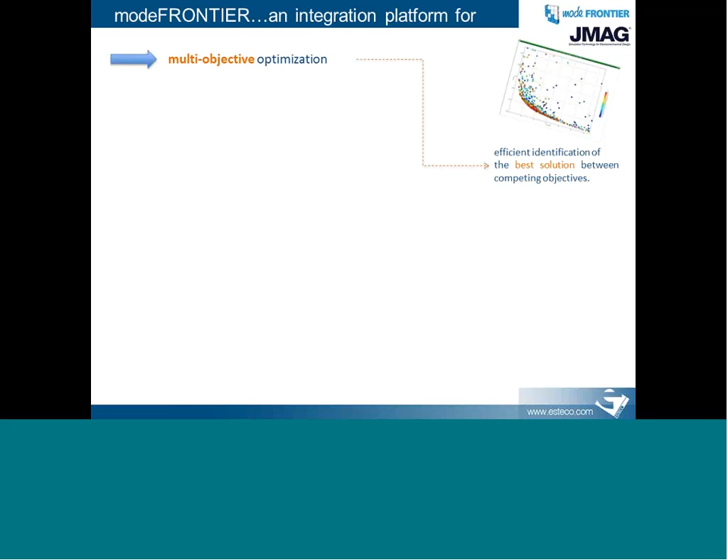Multi-objective means that you will have more than one objective, and these could be in conflict with each other. So the tool will allow you to select a set of optimal solutions that you as a designer can move forward with.

It is also a platform for multidisciplinary design. That means that traditionally people were maybe focused on their own discipline, whether that was structural analysis, electrical analysis, but with concurrent engineering being more popular these days, you have to go into MDO, multidisciplinary design, in order to make sure that whatever changes you make to improve your part of the product does not negatively affect the performance of someone else's component.

In modeFRONTIER, you can automate that by having these different tools that belong to different disciplines link to each other and communicate with each other. So you can take the export from one application and feed that as an input in the next application, and all these processes are automated for you.

Finally, having a good solution doesn't mean much if you cannot really identify what that solution is. You need to have powerful post-processing capabilities to really understand what is your best design, what potential trade-off do I have, does it correlate or does it not correlate, what's the scatter of my data, for example, and that can be analyzed in the post-processing module of modeFRONTIER.

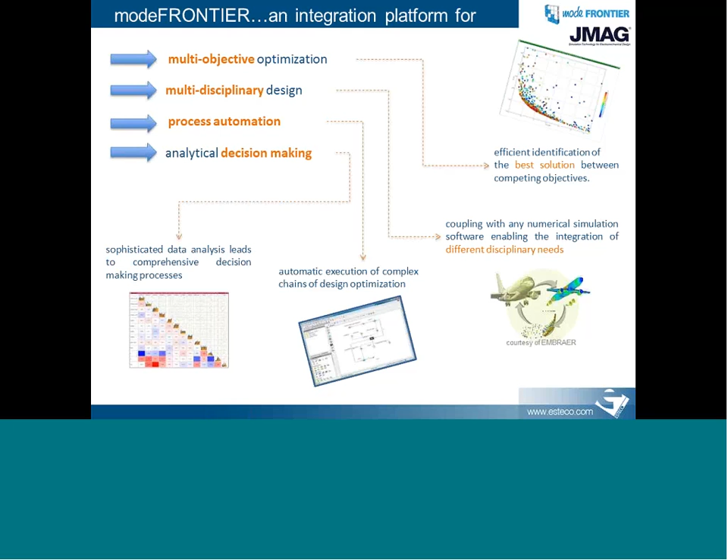These are the main components of the software. On the process integration side, the modeFRONTIER software is very powerful in linking third-party commercial softwares, but also in-house written tools. We have direct integration with many of the most commonly used CAE and CAD packages, but we can also, through simple command line, communicate with your own in-house tools if you have those.

On the design of experiment side, we can use several algorithms to populate your initial design, which can be used as a starting point for your optimization. On the optimization side, we have about 20 different algorithms, varying from very basic to very advanced, and we will cover some of those later today.

Response surfaces can be used instead of a direct optimization, as long as your correlation is high enough, giving you a solution in a much quicker way. On the robust design aspect, if you know you have certain manufacturing tolerances on your product, you can assign those to your input parameters, and the tool will take that into account in its evaluation.

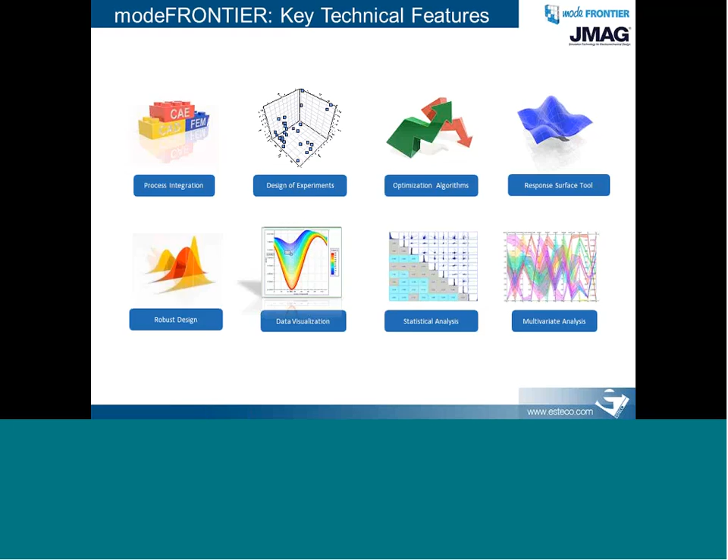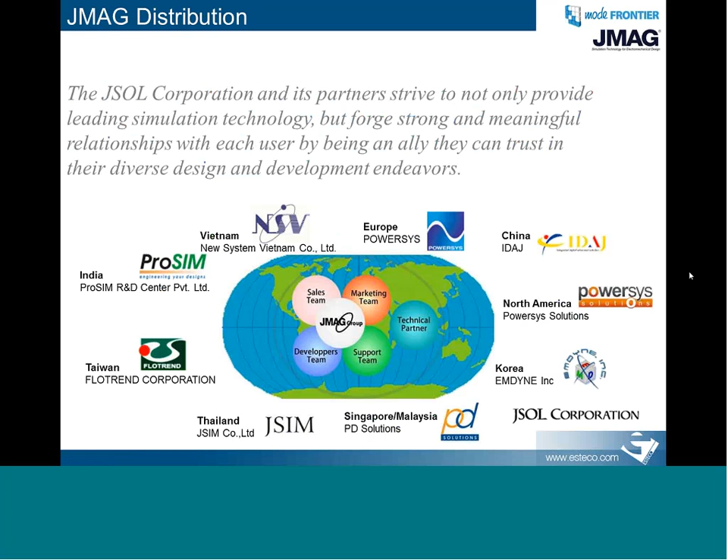JMAG is sold globally through a network of distributors. JSOL handles the sales for JMAG in Japan, but distributors handle the sale of JMAG across the world. The distributor for both North America and Europe is Powersys Solutions. Powersys has been the distributor of JMAG since 2006 in Europe and since 2009 in North America. Powersys' main mission is business development, sales management, pre- and post-sales support of JMAG, promotion of JMAG at various events, and technical support and training services.

Powersys also partners with JSOL to ensure that customers' needs are being met by providing feedback on what customers want from JMAG as well as what their experience in using JMAG is.

So let's take a look at the JMAG product line. We'll start with JMAG-Express, which is a very basic way to set up a template-style analysis for a machine. This covers most basic rotating machines and is easy to manipulate and modify in order to generate a simple motor analysis. We can also build motors or machines or any other type of electromagnetic analysis component using our link with CAD packages such as CATIA, SolidWorks, NX, and ProE.

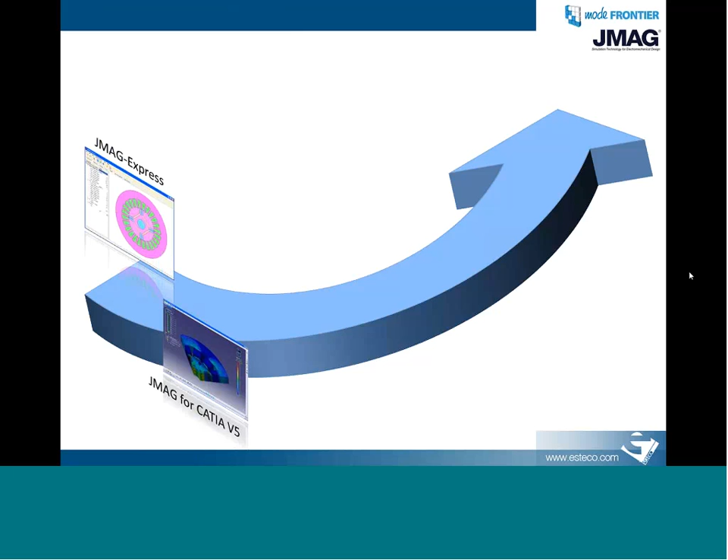Once the model is constructed either in JMAG-Express or in CATIA, we can move to JMAG Designer, where we can do a full electromagnetic finite element analysis. We can also link to programs such as Abaqus, where now we can do multi-domain analyses in structural, thermal, and computational fluid dynamics domains.

JMAG can also use our JMAG RT Motor Model tool, which allows us to create a performance lookup table across the operating range for a rotating machine. These lookup tables can be brought in block form using our JMAG RT Viewer tool, which can help visualize performance across the operating range, in this case showing the efficiency plot versus torque and speed of a rotating machine.

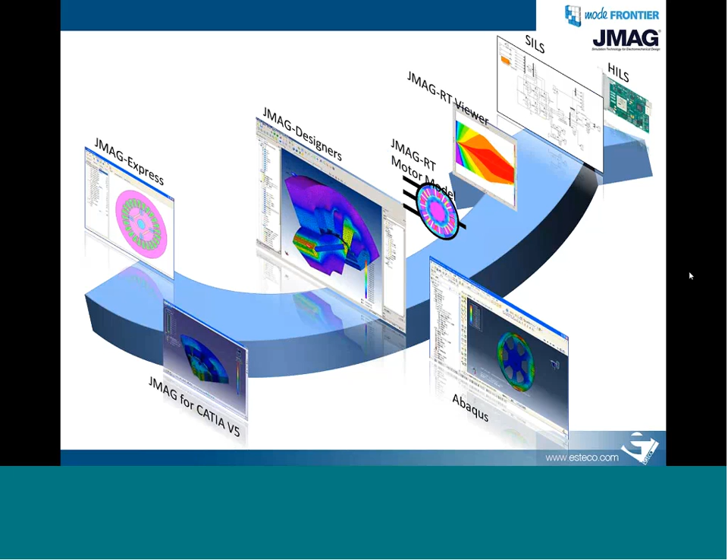That RT block can also be brought into software-in-the-loop simulation programs such as MATLAB Simulink, PSIM, and Synopsys Saber. We can also enter into hardware-in-the-loop simulation systems from companies such as National Instruments, Opal RT, and dSPACE. JMAG Designer can also link with modeFRONTIER to run an optimization analysis, which is the focus of today's webinar.

So let's actually take a look at creating the optimization model in JMAG. Our motor under investigation is an IPM machine with 2 magnets per each rotor pole. The IPM machine itself has a 112 millimeter stator outside diameter, a 55 millimeter rotor outside diameter, and is 37.5 millimeters tall. Its rated performance is at 1800 RPM, which is a 60 Hertz electrical frequency, and the rated torque occurs at a 7 amp peak current, a pure sine wave excitation at a 0-degree phase angle.

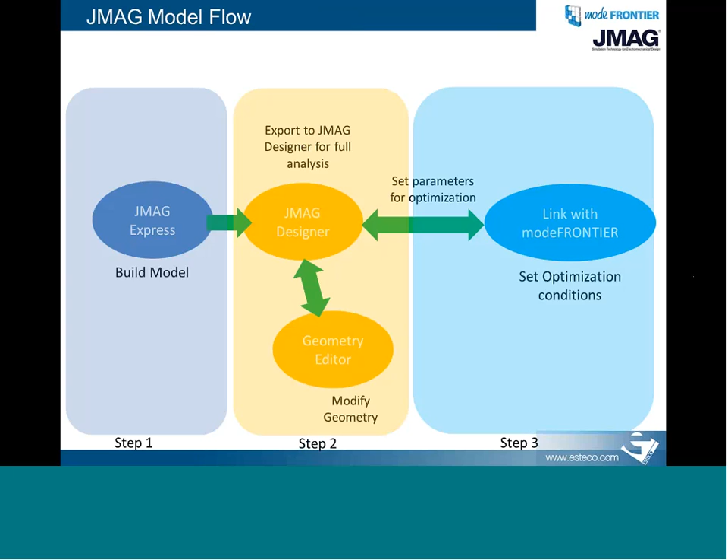Our model flow is like this: we start by building the model in JMAG-Express and then exporting it to JMAG Designer for a full FEA analysis. In JMAG Designer, we can also link to our geometry editor to modify the geometry. The final step is to set the parameters for optimization and the optimization conditions for the link with modeFRONTIER.

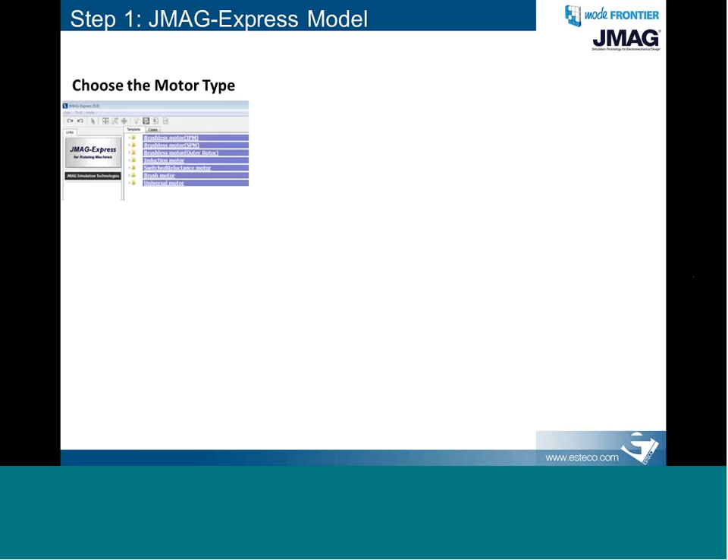So let's start at step 1, our JMAG-Express model. We first open JMAG-Express and choose the type of motor we want to work with. JMAG-Express covers most common rotating electric machines such as IPM, surface permanent magnet machine (SPM), brushless motor, outer rotor, induction machines, switched reluctance motors, brushed motors, and universal motors.

Once we choose the motor type, we select the rotor and stator configuration, and set the conditions using our tabular format. The geometry tools let us automatically modify the geometry, apply different materials, apply windings, and set the drive conditions automatically in JMAG-Express.

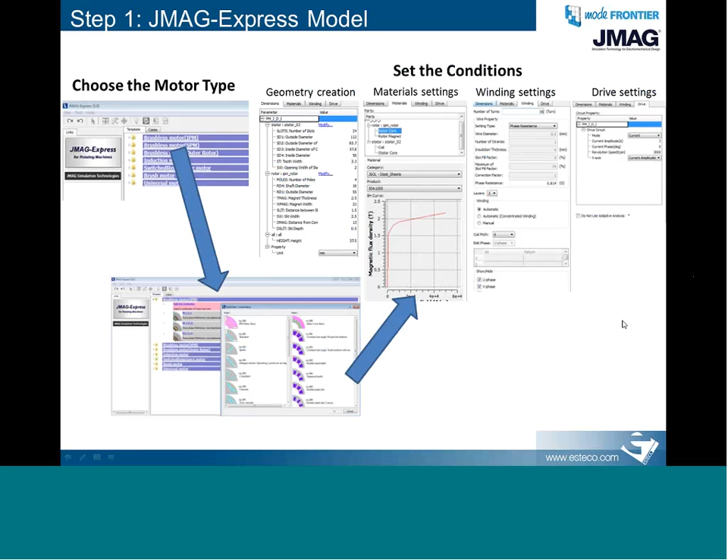Once we've set the conditions, we can run a quick analysis, which provides a rough estimate of machine performance. Effectively in JMAG-Express, we have a calculation setup that takes minutes and results that we obtain in just a matter of seconds.

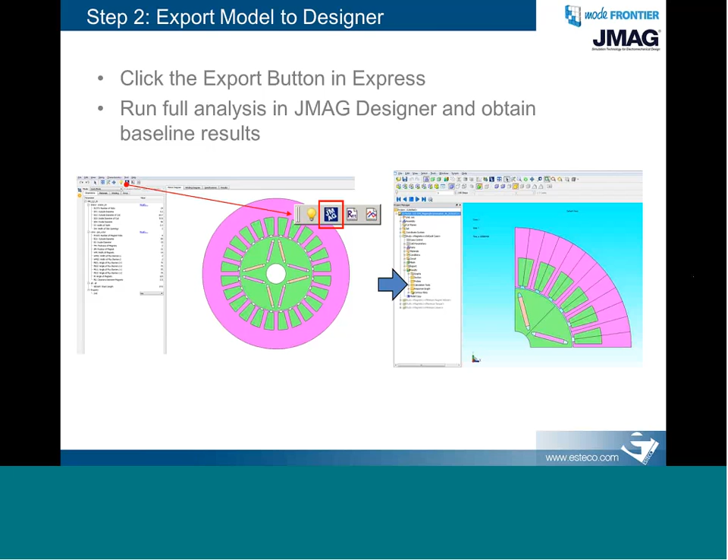Once we're satisfied that the results meet our minimum performance requirements, we can export the model to JMAG Designer to run a full FEA analysis and obtain our baseline results. At this point, I'll pause and switch over to JMAG-Express to demonstrate that process.

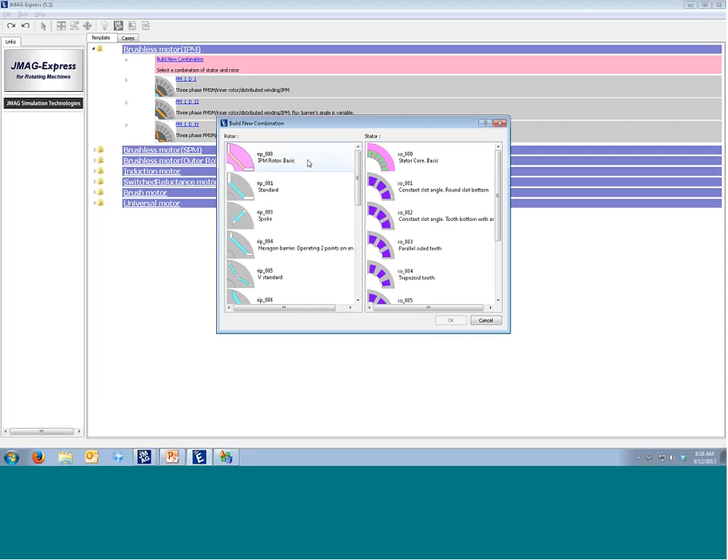If I open JMAG-Express, you can see we can select from our basic machine topologies. In this case, this example is going to use a brushless motor IPM. We can either build a new combination by selecting the specific rotor and stator geometry, or select from some predefined geometries already created in the Express library.

I'll select this geometry, which corresponds to our 2-magnet-per-pole rotor topology. The default geometry brought up actually matches the geometry we want to work with for the IPM machine, so no modifications to the dimensions are necessary.

If we wanted to modify the dimensions, it's very easy to set new parameters. For example, we can change the number of slots on the stator very quickly—I'll just change that back—or go through and change any of the other dimensions in the geometry.

Once our geometry is set, we move to our Materials tab, where we choose materials for the rotor, the stator, and the magnets. In this case, our rotor magnet is a neodymium iron boron with a BR of approximately 1 Tesla.

We've applied that to both the first and second magnet. Our rotor core is a 50A1000, a Japanese or JSOL sheet steel, and that material is also used in our stator core. Again, we can access the entire JMAG material database to apply materials for the stator, the rotor, and the magnets.

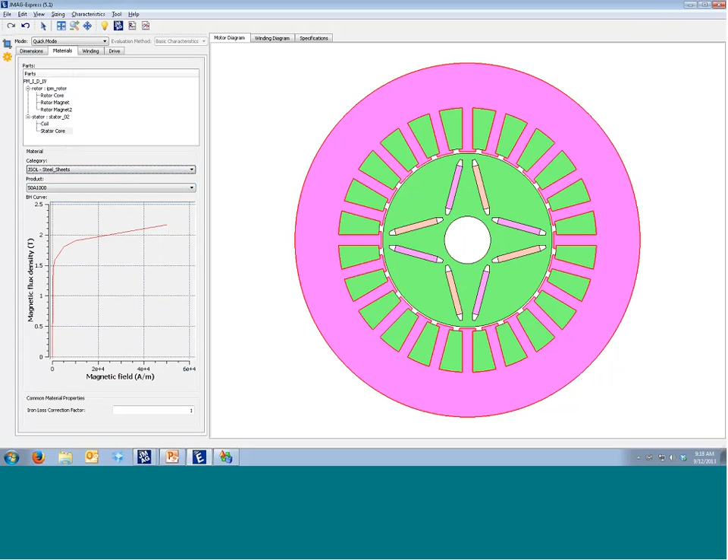Once the materials have been applied, we move to our Winding tab. JMAG will automatically determine the winding pattern based on the number of slots and rotor poles. We can use an automatic winding, an automatic concentrated winding, or manually set up the winding by specifying the input and output slot for the coil.

Once the windings are set, we move to our drive conditions. This is the only difference between this model in Express and the model we want to analyze for the optimization study. This model currently uses a voltage source.

We want to switch that to a current source, and change the peak amplitude from 3 amps to 7 amps. I also want to change the rotational speed from 3,000 RPM to 1,800 RPM.

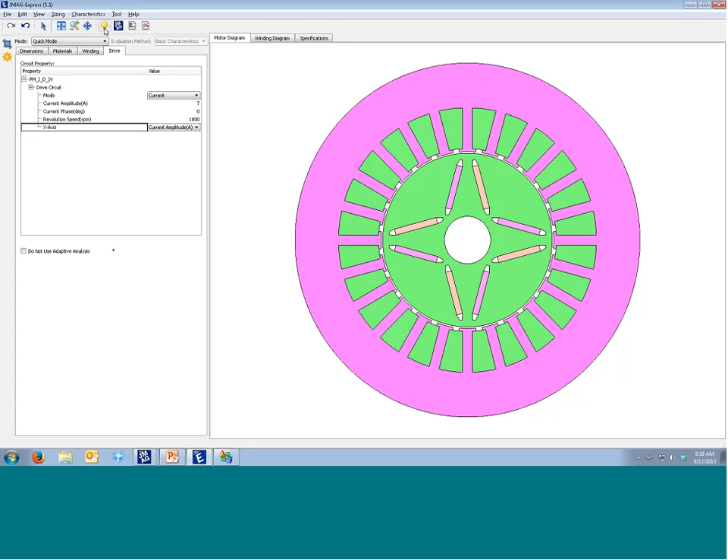At this point, we can run the quick analysis by pressing the light bulb button. As I said, results are generated in just a matter of seconds, so it's a very good first-pass approximation for machine performance. The results we can view now include torque versus current, efficiency versus current, copper and iron losses, DQ inductance, phase voltage versus current, torque constant, average tooth flux density, and rated current.

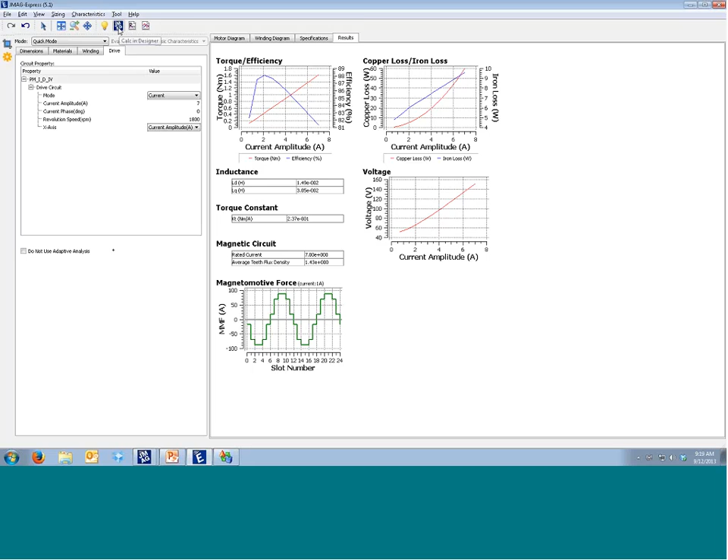We can also visualize the magnetomotive force. So once we get a machine performance that looks approximately correct or achieves the approximate results that we want to see, we can then click on our Calc in JMAG Designer button, which is then going to ask us to export a JCF file. I've already set up a folder on my desktop and exported the JCF file for this analysis.

When the model is exported from JMAG-Express into JMAG Designer, all the settings have already been applied. Our assembly components have already been set. Our analysis conditions have already been applied for both all the phase coils, any periodic boundary conditions, the rotational condition, the torque condition, and any other boundary conditions that need to be applied.

So effectively at this point, all that's left to do is right-click on our study and click Run Active Case. I've already run this analysis, and this will take maybe about 1 minute to 2 minutes, but I didn't want to slow down the webinar by going and having to wait that minute and a half for this to compile.

So once we finish running the analysis, now we can view the results. So again, this is a full FEA analysis, which will give us some pretty comprehensive data as far as the material performance goes, or the actual machine performance.

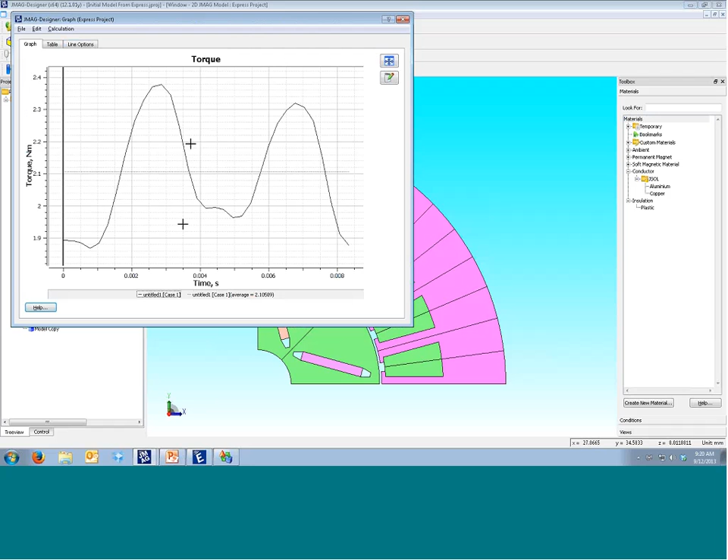So now in our results, I can look at things like our average torque. So there's our torque waveform, and then our average waveform can be set by clicking on the average button. So now we can see how that is applied to create that average value. So I'll close that down.

We can also look at contour properties such as the magnetic flux density, vector parameters such as, in this case, again, the flux density, or flux line plots. So again, coming in from JMAG-Express, we have a full and comprehensive FEA analysis capability in JMAG Designer.

So now I'll step back into the presentation and we'll talk about what we're going to do for the optimization. You can see we have our machine here, and what we want to optimize is basically the rotor magnet geometry. So the geometric parameters that we're going to pull out are the magnet thickness, the magnet width, the magnet angle, the magnet clearance, and the magnet position.

The thickness and the width of the magnet, as well as the magnet angle, are pretty self-explanatory. The magnet clearance is the space between the center line, or the edge of the rotor, and the end of the magnet. And the magnet position is the position of the front edge between the front edge of the magnet and the origin of the rotation.

Besides the geometric parameters, we also want to optimize the machine parameters, and for this we want to take a look at changing the applied current phase angle. To judge the quality of the optimization, we're going to set a couple of the output parameters. These are the average torque and the stator iron losses.

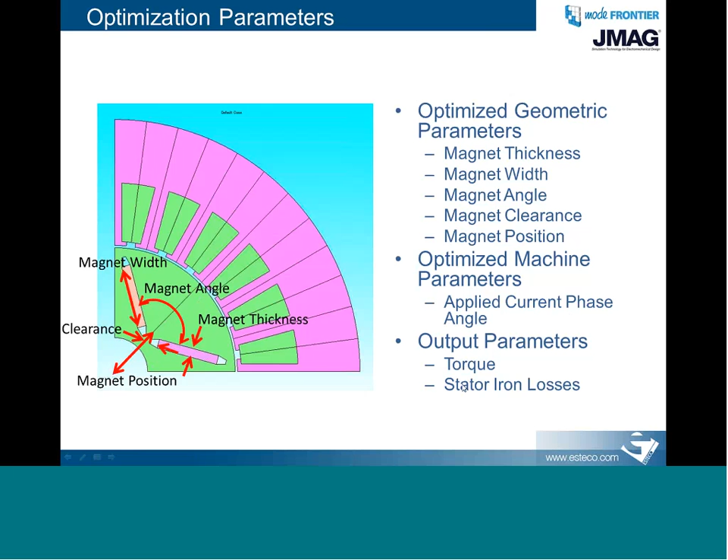When the model comes in from JMAG-Express into JMAG Designer, it has a default naming topology for all the dimensions that were used to generate the model. This naming convention can be a little bit hard sometimes, or a little bit confusing to go through and pick out the actual specific dimensions that we want to work with.

So sometimes it helps to open the geometry editor and rename some of the CAD parameters in the CAD parameter list to more easily identify them when you're trying to set the conditions for the optimization.

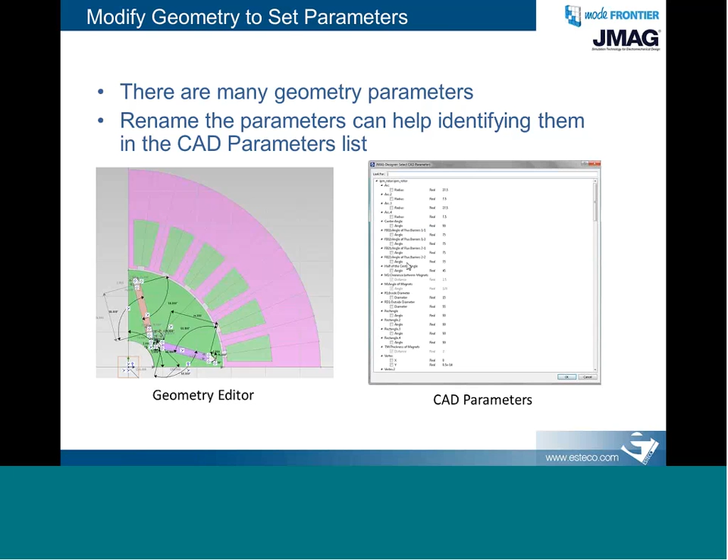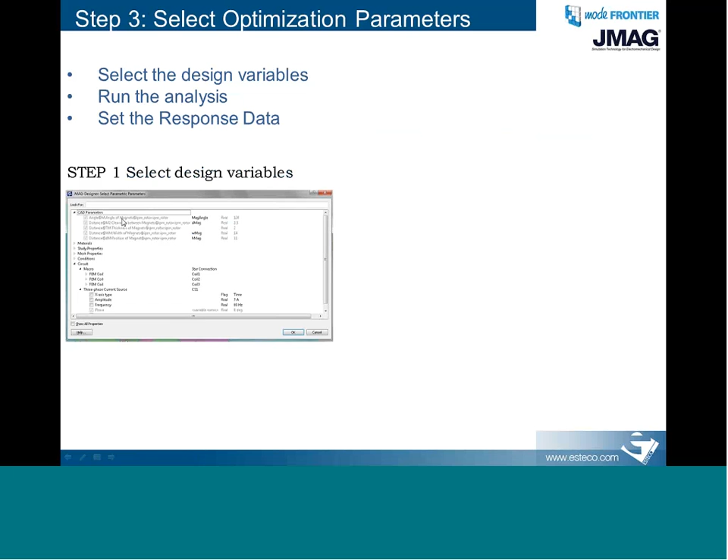Once we rename them, if we want to, we then have to select the design variables. So when we select the design variables, now we're going to open the list of the parametric parameters available in the JMAG Designer analysis, and we're going to choose the parameters. In this case, I've highlighted our CAD parameters, which again are the angle of the magnets, the clearance between the magnets, the thickness of the magnets, the width of the magnets, and the position of the magnets.

Once we've selected our design variables, we can then run the analysis. After we run the analysis, now we can set the response data. So we have to run the analysis in order to set the response data, because the response data is effectively the output of the analysis. So in order to generate the output of the analysis, we actually have to run the analysis.

So when we select our response data, now we can pull out from all the other parameters or all the other data that we've achieved in our analysis. Now we can pull out the specific data points that we're most interested in.

In this case, it's our torque, and I selected our iron loss on our stator and the iron loss on our rotor. In this case, we're not going to use the rotor iron loss, so it's a bit of a superfluous setting, but I left it in there anyway, in case we wanted to go back and add that to the optimization at a later date. So at this point, I'll step out of the presentation and go to JMAG Designer in order to do that demonstration.

So now I move into JMAG Designer, and this is effectively the same model that we got from JMAG-Express. I did make a few modifications, though, in order to more accurately capture the results. First off, you can see I changed the number of steps. The default coming out of Express is 33 steps, so I changed that to 65 steps to get a little bit higher fidelity, and to add a little bit more time.

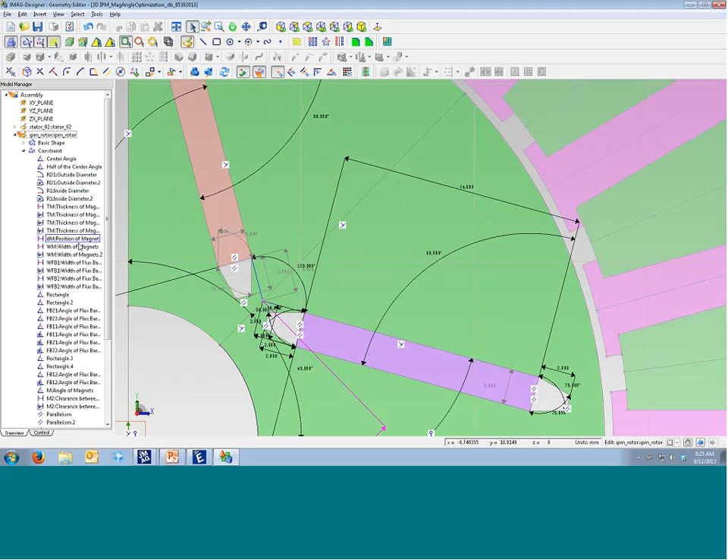Now, though, we have to go through and select our CAD parameters. As I mentioned, we can go into our geometry editor and we can change the names of some of the parameters. So again, the default naming scheme can sometimes be a little bit confusing, and you can see there's a lot of different constraints that we're going to have to sort through.

So I can go through and by clicking on any of the constraints, I can rename them to make them a little bit more easy to find.

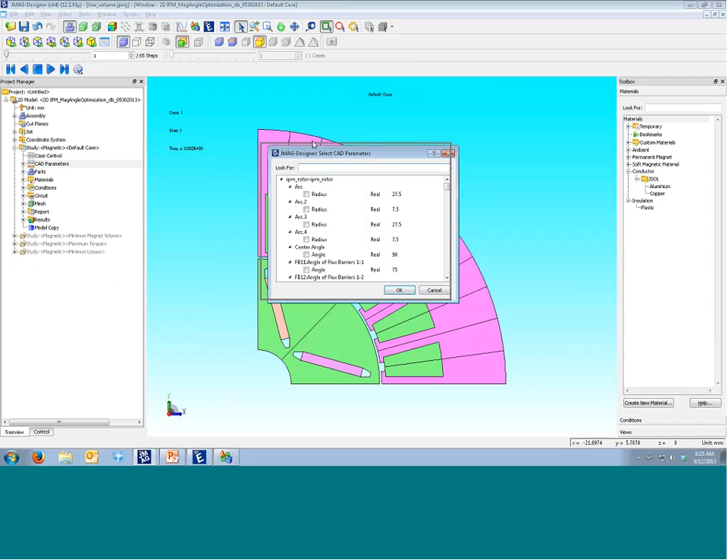Once I've renamed them, now I have to go through and actually select the CAD parameters that I want to optimize. So when we're setting our parameters for optimization, there's our main optimization list, but then there's also our CAD parameters that have to be selected separately. So I'll right-click on our CAD parameters and click on Select CAD Parameters, and this will give us all the constraints that we just saw on the geometry editor.

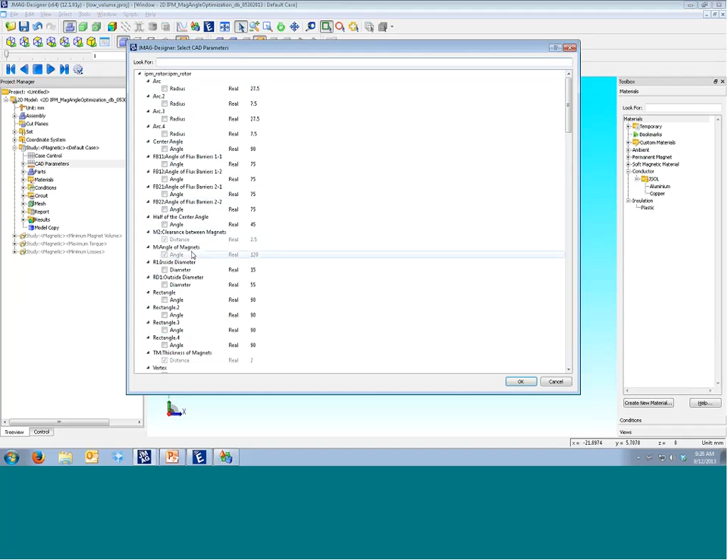So as I said, sometimes there's a lot of constraints, so renaming something a little bit more familiar to yourself might make things a little bit easier to identify. In this case, I've selected the clearance between the magnets, the angle of the magnets, the thickness of the magnets, the width of the magnets, and the position of the magnets.

So once I select those points, they're populated under my CAD parameters list. And so now this means that I can go through and I can actually click on Modify and then change the value. This value is actually grayed out since I've run the analysis, but if this was an empty analysis or if this analysis didn't have results, I could go back and change any of these dimensions and then apply them to my actual physical JMAG model.

Once I've specifically called out the CAD parameters, I can now go and select all the parameters for my optimization. So I select all the CAD parameters that I've chosen, and then I can go through and I can select any of the other properties in this analysis for optimization. So I can change the materials, I can change some of the study properties, I can change the mesh properties, and I can change the conditions in my magnetic circuit.

So in this case, I'm not going to change any of the coil conditions, but I am going to go through and select the phase angle on that excitation current. Again, the default value is 0. We want to optimize this to determine the correct phase angle to give us the maximum torque point.

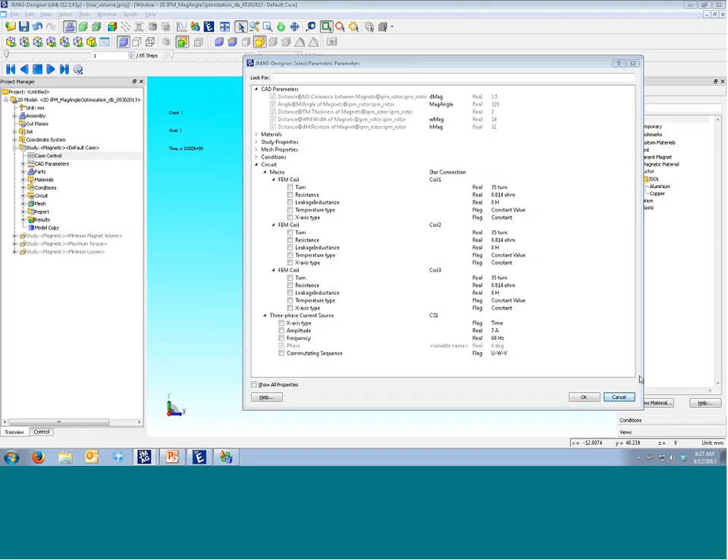Once I've selected the parameters in that parameters list, I run the analysis and generate the results. Once I generate the results and look at the graphs and tables, there's a lot of results to sort through. If I had to pick these out or go into modeFRONTIER to do the optimization and sort through the entire list of possible results, it would be a bit tedious.

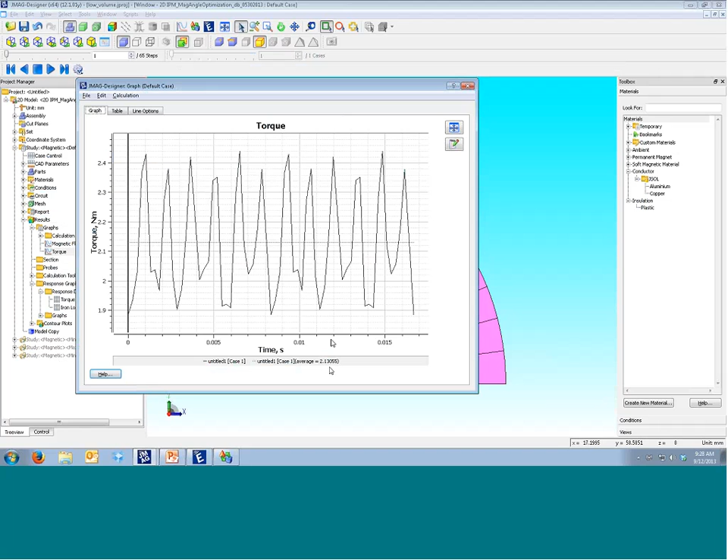So to make that easier, we added the response data function, which means we can take a value or a point sequence value such as torque and come up with an average value for our torque. Let's take a look at that. If I graph it, our average value is about 2.13 Newton meters. So I can go through in our tabular data, click Summary, get that average value of torque, and then click on Response Data to register it as response data.

I'll do the same thing on the iron losses, where I'll click on Response Data and register my stator and rotor iron losses as response variables. When I register the response data, it's collected in this response graph in the response data folder. So now I can see I've registered torque and my iron losses on the stator as response variables. At this point, all that's left is to click Save, and now I can move the model over to modeFRONTIER to do the full optimization on it.

But before I hand the presentation back to Brandon, I want to mention a couple things. The goal of this optimization is to minimize the magnet volume, maximize the torque, and minimize the stator iron losses, all while having a motor that achieves at least 2 Newton meters of average torque.

Since this is an IPM machine, the magnet size and shape play a significant role in the actual output performance of the machine. An IPM machine also derives its total electromagnetic torque from both a reluctance torque component as well as a magnet torque component. This means that since I have a reluctance torque that is a significant player in the total torque, my actual peak torque as a function of phase angle will not occur at 0 degrees, as it would in a surface permanent magnet machine, but at some other value.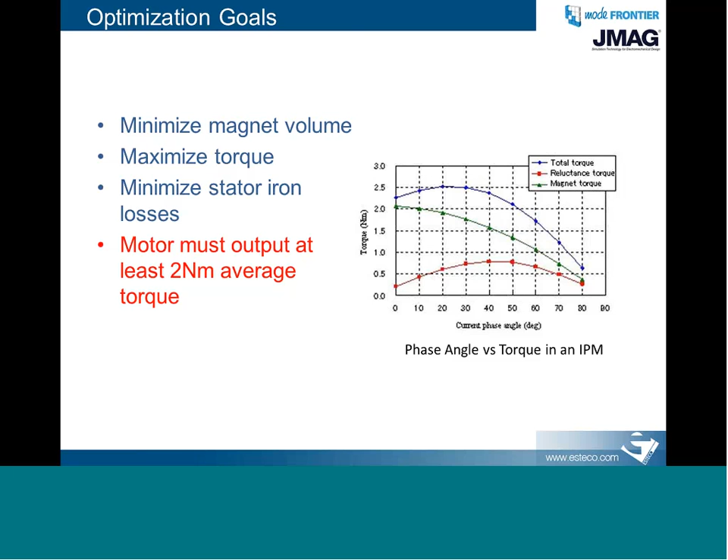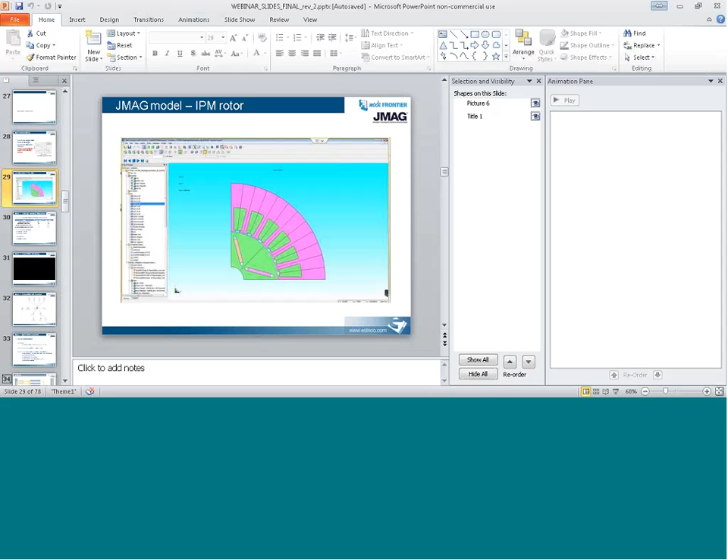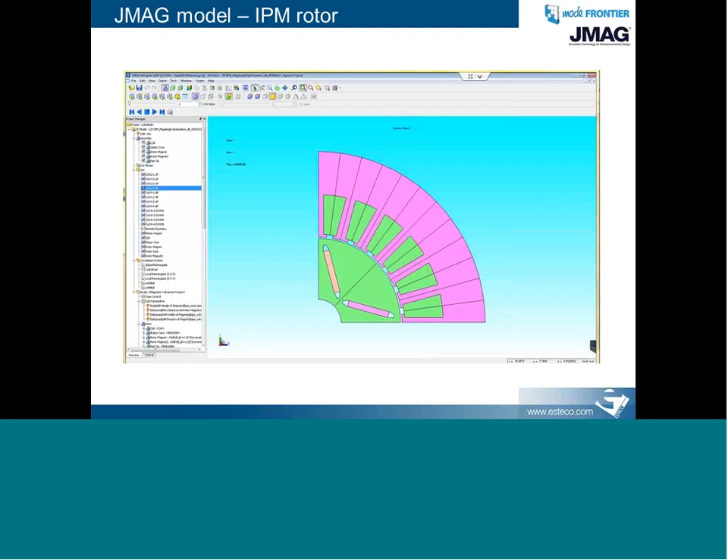We already went through the model a little bit. This is the model that we're using to run the optimization. I'm actually going to show you two cases here.

The first case had 4 design variables with 2 objectives. The design variables are magnet angle, magnet width, the position of magnets, and distance between magnets, with the goals of minimizing iron loss and maximizing torque simultaneously.

As Dave mentioned, we'll have a constraint that torque must be greater than 2 Newton meters. Using that problem statement, I can show you how we would set that up in modeFRONTIER.

I'll start this video demonstration, and you'll see my colleague Roel mentioned earlier briefly about the modeFRONTIER workflow. What you see here is the modeFRONTIER GUI, the standard view. The main window is the workflow window, and that's the canvas we will use to build our problem statement.

So you'll see that in the video we go into our application nodes section and drop in a JMAG application node, and then we can specify our JMAG model that we'll be using. Once we do that, we can fire up what we call a parameter chooser, which reads the JMAG model using a modeFRONTIER script and pulls out those CAD parameters we specified in the model parameter list. So once that's done, we have a list of variables that we can select to have in modeFRONTIER.

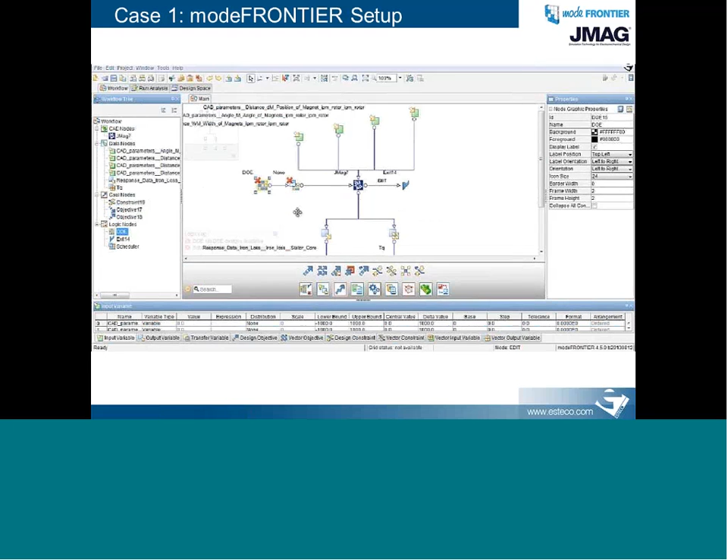Okay, once we specify our initial population of points, I'll just let it go through here again real quick. We can select an optimization algorithm from modeFRONTIER's suite of algorithms. Each one has a slightly different approach.

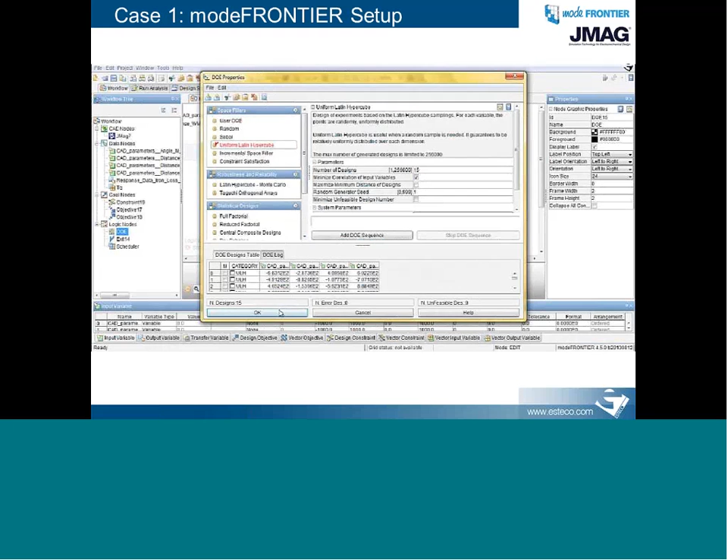In this case, or for this example, we used 3 different algorithms in our optimization, and 3 separate optimization problems. But here you can see we selected our NSGA2 algorithm to optimize.

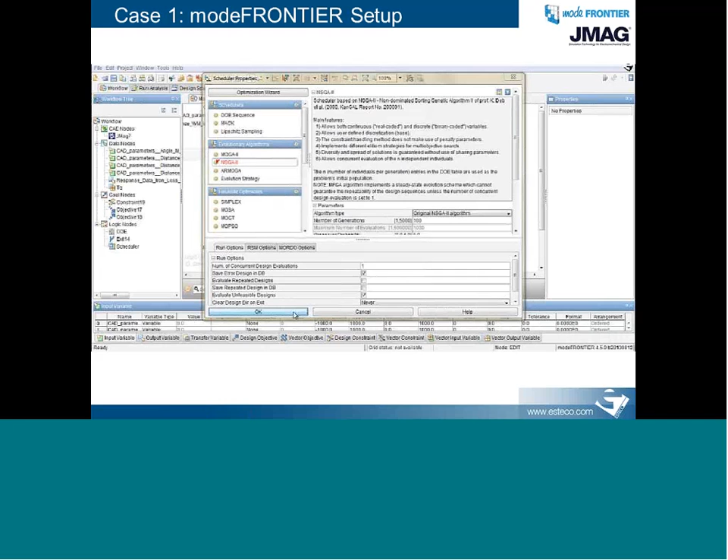Okay, so that's all that it takes to set up an optimization problem. We did this in just about 2 minutes, if you know what you're doing. So...

Okay, so this is our final workflow here. You can see I've modified the names of the variables to be shorter from what the names are in the JMAG model, and cleaned it up a little bit, but this is what our workflow looks like. So again, we have 4 input variables going into our JMAG process and 2 output variables. One is iron loss, the other torque, minimizing iron loss, maximizing torque, and constraining torque to be greater than 2 Newton meters.

Okay, so in this case, we ran a direct optimization using our NSGA2 algorithm, which is a genetic approach developed by Professor Deb. This is a good approach to fully explore our design space and avoids being caught in a local minimum or maximum, and can be used to find the global maximum.

We also used a hybrid approach, which uses a genetic approach plus a derivative-based approach. So it runs a genetic algorithm, but a few designs will be calculating a derivative, calculating the direction of maximum slope towards your objective. That derivative-based approach pushes the genetic algorithm toward the optimum a little bit faster than, say, an NSGA2 would.

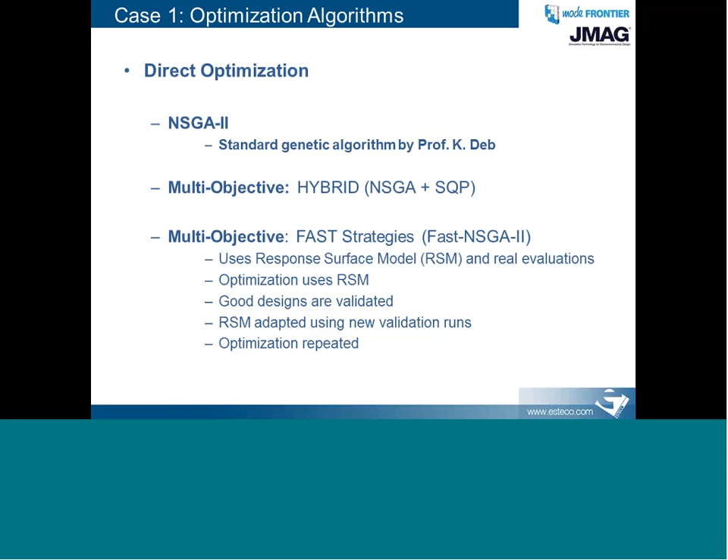Okay, and I'll show you a case or an optimization with each one of these approaches. So we had, in case 1, we're using NSGA2 with 15 initial population, which actually might be a little bit overkill in this case with 4 variables and 2 outputs.

And for each evaluation, it took 90 to 120 seconds on our workstation. This time actually just depends on the amount of time it takes to evaluate your JMAG model independently of modeFRONTIER. But this is the amount of time it takes for each evaluation with modeFRONTIER as well.

We didn't use any concurrent evaluations, meaning that we only ran one JMAG model at a time. However, it is possible to run concurrent evaluations if your licenses allow it, or if your hardware allows it.

So in our case, we ran a single design at a time, and we evaluated 1,000 designs with NSGA, about 67 generations of 15 points each. And this took about 29 hours total, so this takes about a full day for an optimization using this number of generations.

However, you'll see also that it's not necessary to run quite so many in this case. It is possible to stop before those 1,000 points are fully through.

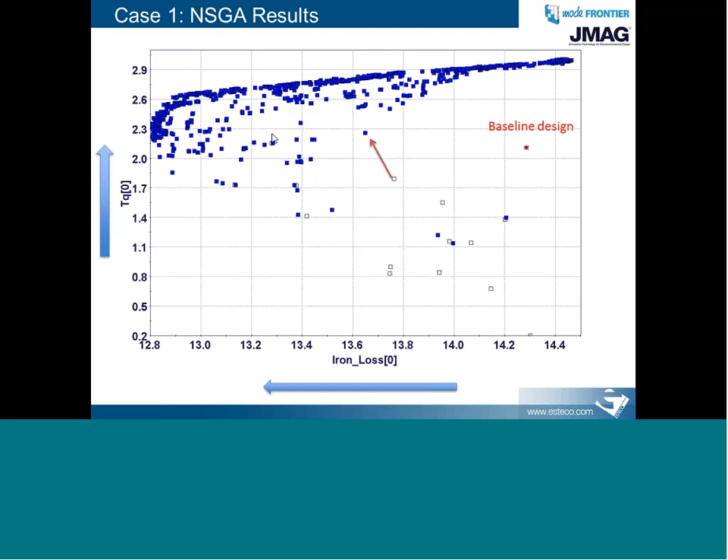So you can see here, we can pull out just the optimum set of designs called the Pareto front that NSGA2 determined. So you can see that we have sort of a convex shape here, which has a strong curve near the left end and then kind of tapers off toward the right end of the graph, where torque increases slightly and iron loss increases drastically.

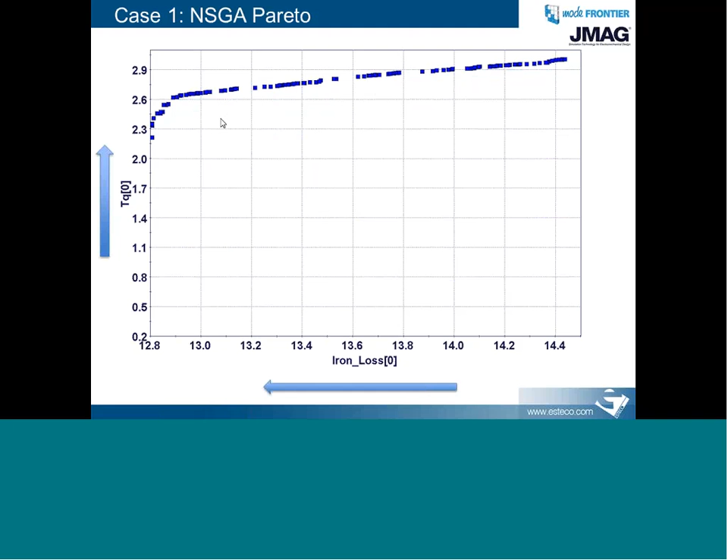Okay, so I can show you kind of a progression of how the NSGA2 algorithm worked. So this is a scatter of points that NSGA2 found after 200 designs, about 6 hours of runtime. You can see that the Pareto front is starting to form, but it's not quite as full as after the full run. But it's starting to improve upon the original 15 points drastically here.

And after 400 designs, you can see that the Pareto front is becoming even more defined, still a little bit broken in some points. Again, this is after 12 hours. Then after 600, you can see it keeps progressing, keeps filling in that Pareto front. After about 800 designs, it's just about fully explored that Pareto front, with a couple of gaps here. And then finally, after 1,000 designs, this is what the algorithm came out with.

Now our next optimization case, we ran hybrid on the same problem. Again, 1,000 designs, about 29 hours total, with the same 15 initial points. And you can see this is the final results of the optimization study.

You can see actually our baseline design that Dave showed you earlier is located on this point in the graph, so it represents a very high iron loss compared to most of our optimum designs, and a lower torque. So you can see that the optimization algorithm improved upon both of those objectives.

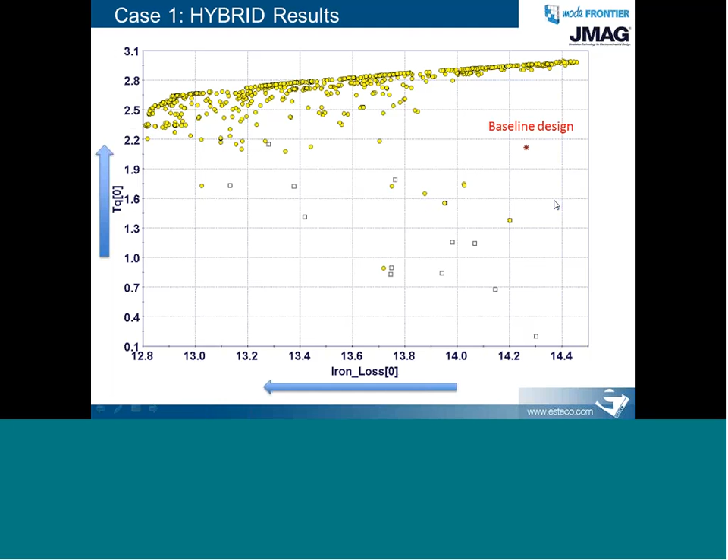So the difference between hybrid and NSGA is that the hybrid uses a derivative-based approach to speed up the convergence of the optimization. And you can see the effects of this, that more points are concentrated along the Pareto front compared to the NSGA algorithm. So here are the Pareto points - again, this is the set of optimum points that the optimization algorithm determined that we can choose from.

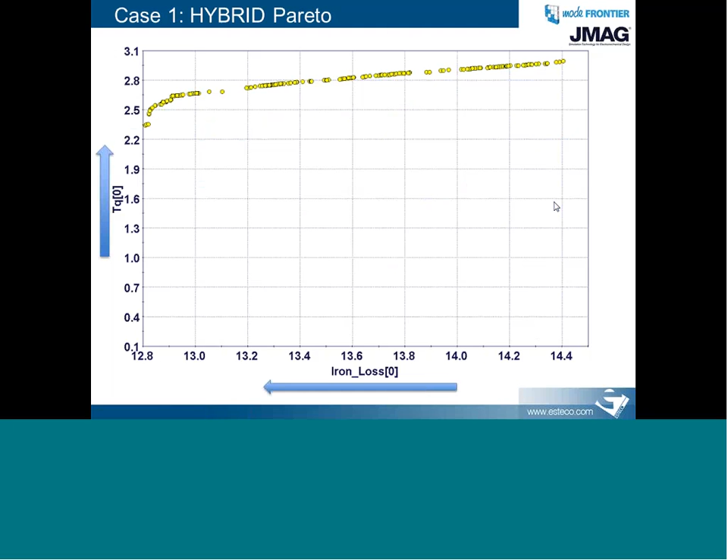And again, we have a progression here. After 200 points, this is what the optimization looked like. And then after 400 designs, you can see that the Pareto front is beginning to fill out more here. At any point in this optimization, if you determine that you're dissatisfied with the designs, you can always stop it and pick a point along this Pareto front. You can see that they've already improved much upon the baseline design here.

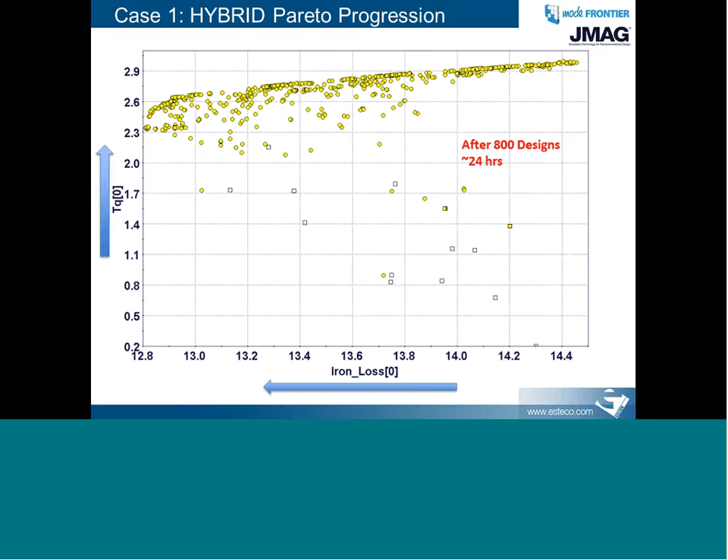And then finally, we ran a third algorithm here called FAST. Again, this uses a response surface to approximate your output and speed up the optimization. And here you can see a clear difference that almost all of the points are concentrated along this Pareto front, which is good.

After 200 designs, you can already see that the Pareto front is pretty well defined, whereas compared to the other algorithms, it was not quite as well explored or even found yet. This is clearly our best case running the optimization here with the FAST algorithm. And after 400 designs, you can see it is pretty much fully populated this Pareto front, whereas it took maybe 800 to 1,000 for NSGA and maybe about 600 for hybrid.

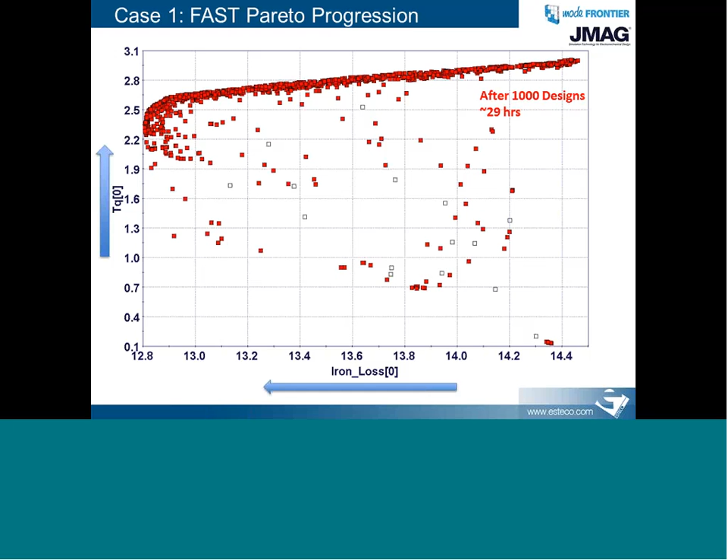So this can show you that using a different algorithm can drastically improve the speed at which you converge and the amount of which you explore the design space. So here you can see that there really wasn't much benefit of running up to 1,000 designs. You probably could have stopped after 400 and gotten the same results. So again, running 1,000 designs might be a little bit of overkill in this case, but just to show you how our algorithms progress.

And now I can show you a direct comparison between the algorithms. So we have NSGA2, the full 1,000 designs here. I can overlay that with our 1,000 hybrid points, and you can see that maybe hybrid has a bit better concentration near the optimum, especially around this region. And then finally, we can compare that directly with FAST, which is clearly much better because it concentrates nearly all of the points near the Pareto front and has much fewer dominated points in this region of the graph, and it reached that much quicker.

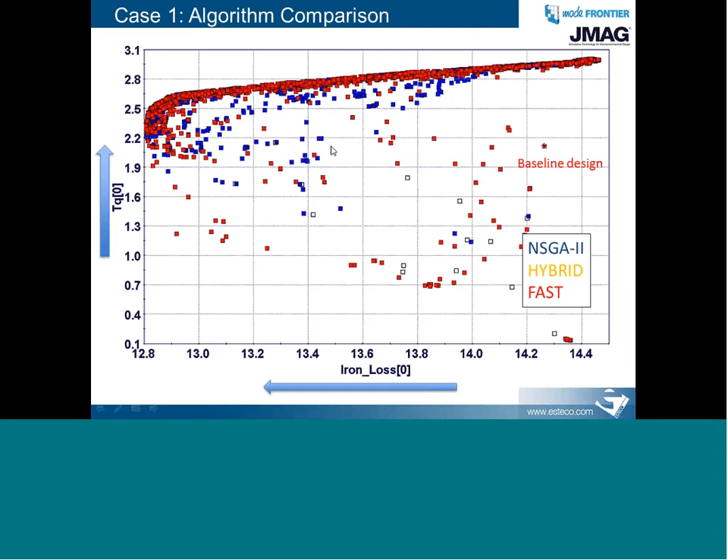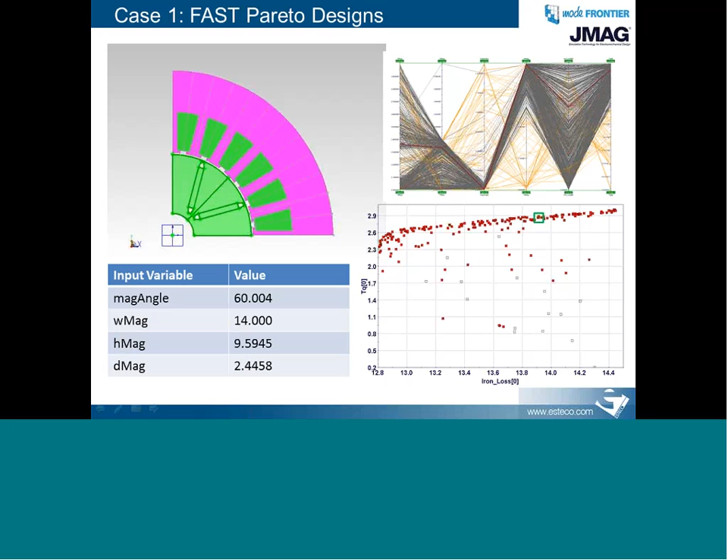So we ran another case with the full 6 design variables that Dave showed you. In this case, we added the variable for the thickness of the magnet and also the phase angle of the current. We also added an objective to minimize magnet volume simultaneously with maximizing torque and minimizing iron loss, and we kept the constraint for keeping the torque above 2 Newton meters average.

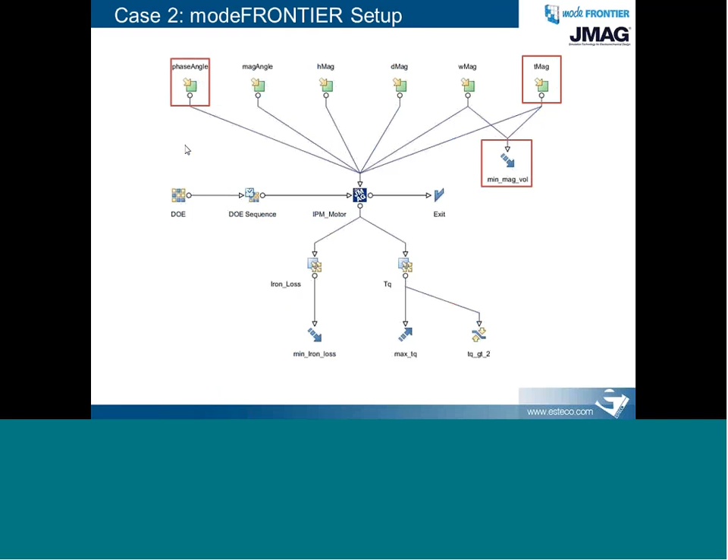So this workflow is very similar to the one I showed you before. However, we've just added the thickness variable to the workflow, and then an objective on it as a combination of the width of the magnet and the thickness of the magnet, and the phase angle as an input variable. This can be done in literally a matter of seconds in modeFRONTIER.

It's very easy to create a new optimization problem or statement. In this case, we ran the same 3 optimization algorithms, NSGA2, hybrid, and FAST, and also ran a design of experiment study using a uniform Latin hypercube. We ran a large number of points using a DOE just to explore our design space in a uniform manner, and from there we can perform a sensitivity analysis and determine the effects of our inputs on our outputs, and then also train a response surface to attempt to approximate our outputs, which we can use to run a virtual optimization using an approximation model.

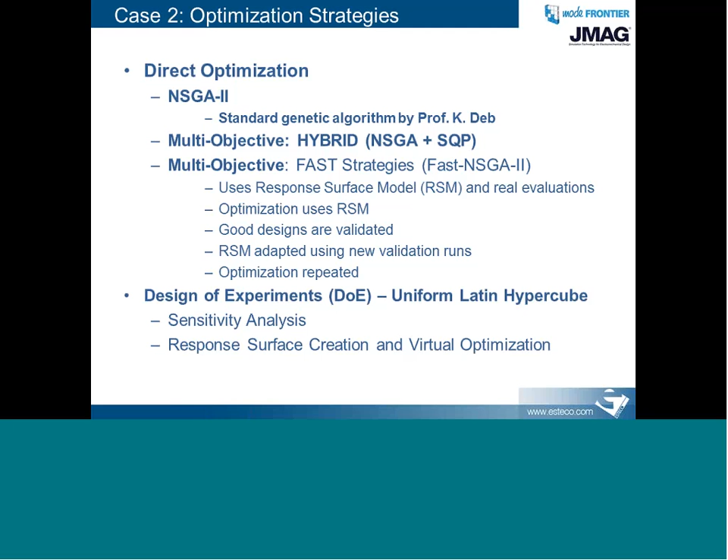In this case, we ran 25 uniform Latin hypercube DOE points, and again, this may be a little bit more than you'd run if you're on a time crunch, but in general, the more input variables you have in your workflow, the more DOE initial population you will want to run. You could probably get away with running about 15 for a 6-variable case. Again, we ran about 1,000 points total, and this took 29 hours.

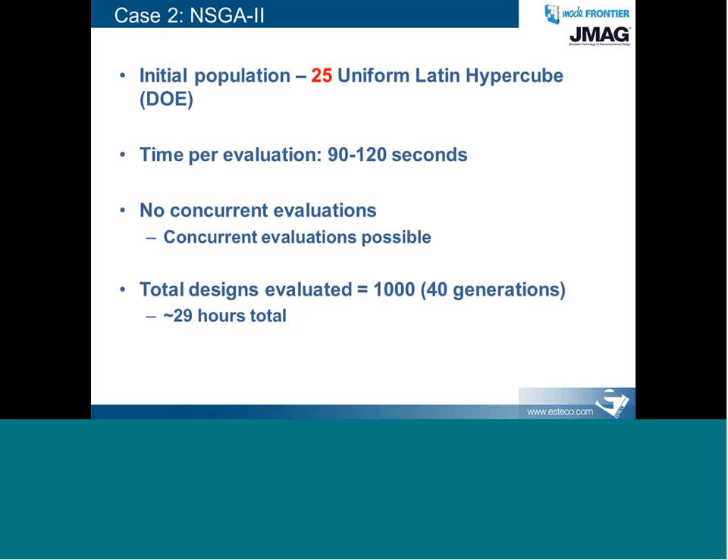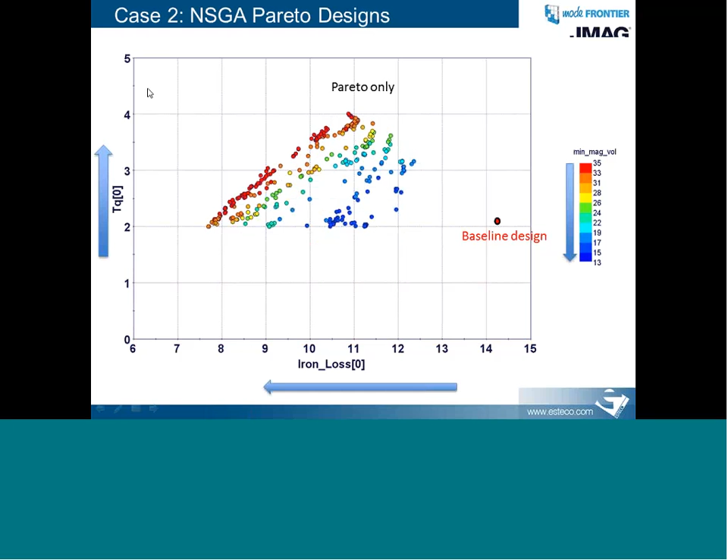You can see that we have a clear trade-off between torque and iron loss, and then also magnet volume. This is actually a Pareto surface now, because we have 3 objectives which all trade off with each other. You can see our baseline design is over here, so it's dominated by each of the points in the Pareto set. We can conclude that our optimization algorithms were able to pull out a good set of designs here.

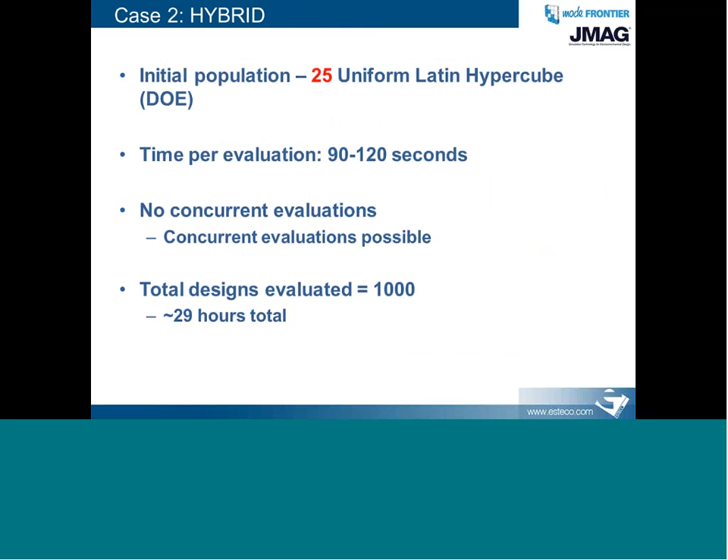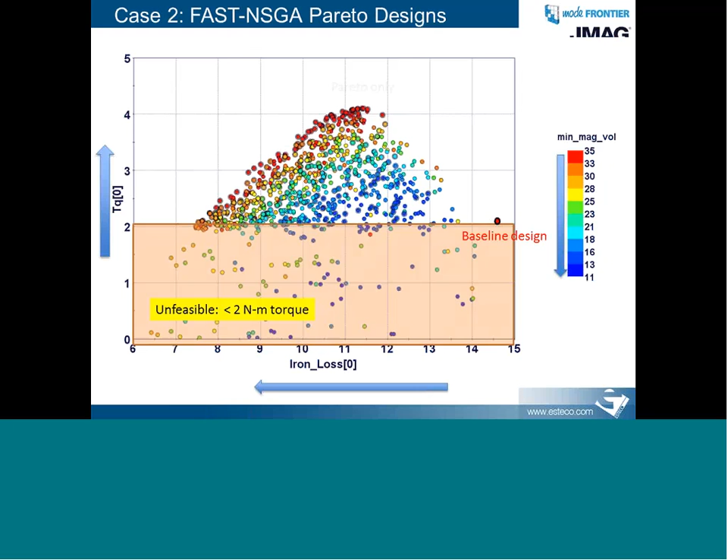And finally, with our FAST algorithm, you can see that now we have actually a much greater spread of points overall, and the Pareto set is much more finely distributed, so you have a greater set of points you can choose from that are considered optimum designs.

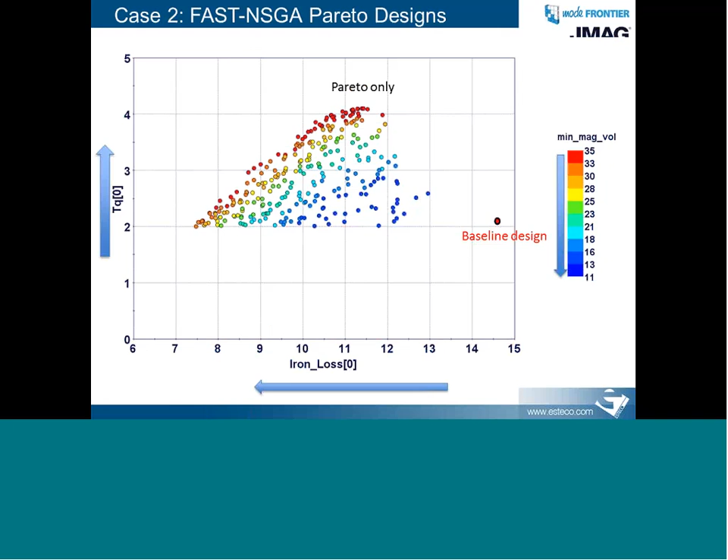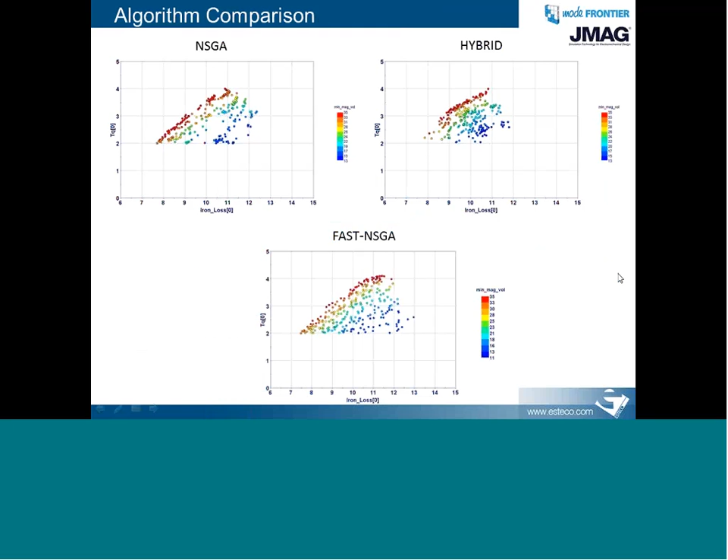So here is a side-by-side comparison of each of the algorithms. You see that FAST-NSGA, again, has a much better spread of points, which is the goal. So in this case, we would also recommend running FAST-NSGA for this type of problem.

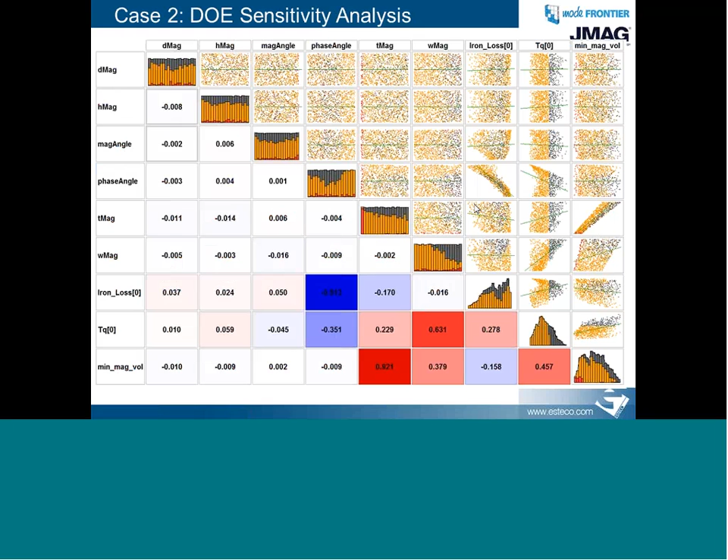Okay, we're running a little short on time, so I won't go through the DOE study too much, but this is another post-processing tool we use called scatter matrix, which can be used to determine the effects of our inputs on our outputs. You can see general trends our inputs have, whether they're directly correlated with, say, torque or iron loss, or inversely correlated with torque or iron loss.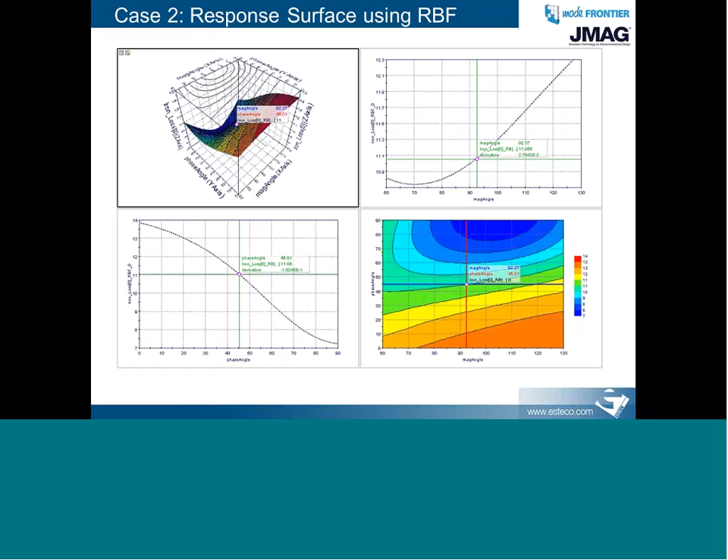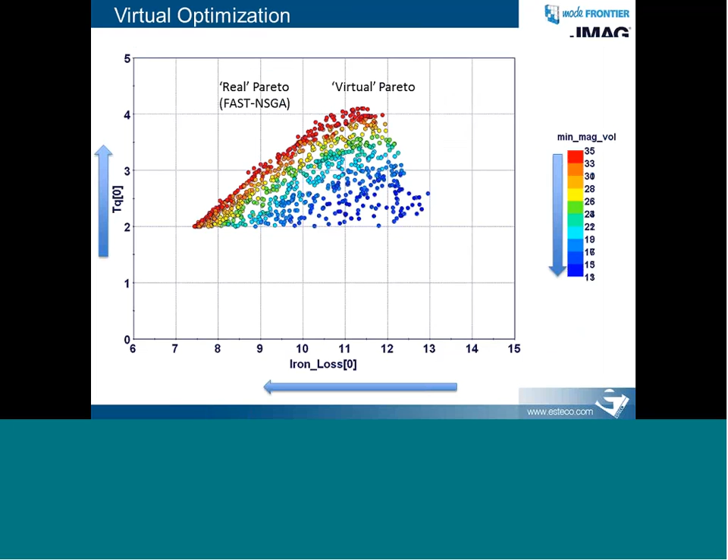We can train response surface models using that data set, which approximate our output, and then run what we call a virtual optimization, an approximate optimization. As you can see using the virtual Pareto, it's very similar to our real set of designs determined by our FAST algorithms, and this can be used to quickly determine an approximate optimum design.

Okay, so conclusions from the study. FAST-NSGA provided the best Pareto front in the fewest amount of designs in each case, in our 6 design variable case and our 4 design variable case. The Pareto frontier obtained from the 6 design variable case dominated the Pareto frontier obtained from the 4 design variable case because we added more freedom to our model.

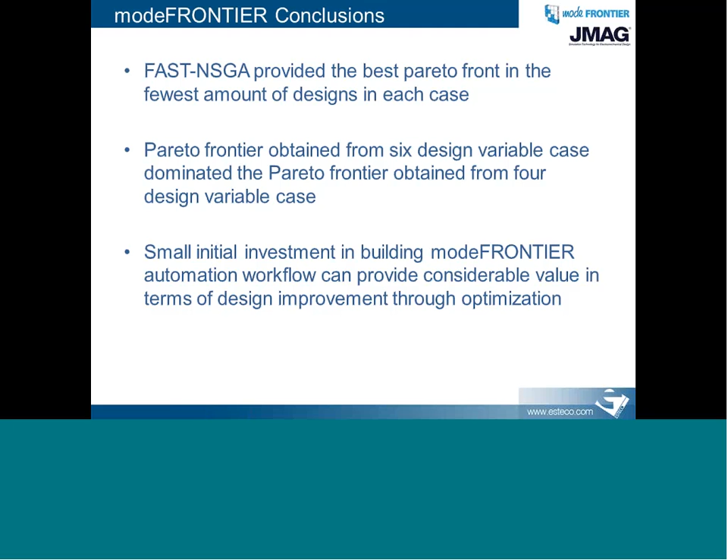Finally, a small initial investment in building the modeFRONTIER workflow, automation workflow, can provide considerable value in terms of design improvement through optimization. Each of these studies was run in the course of a day, and it could be run in even less time if you ran concurrent designs, and if you decided to stop your optimization before 1,000 designs, which quite frankly was a little bit of overkill.

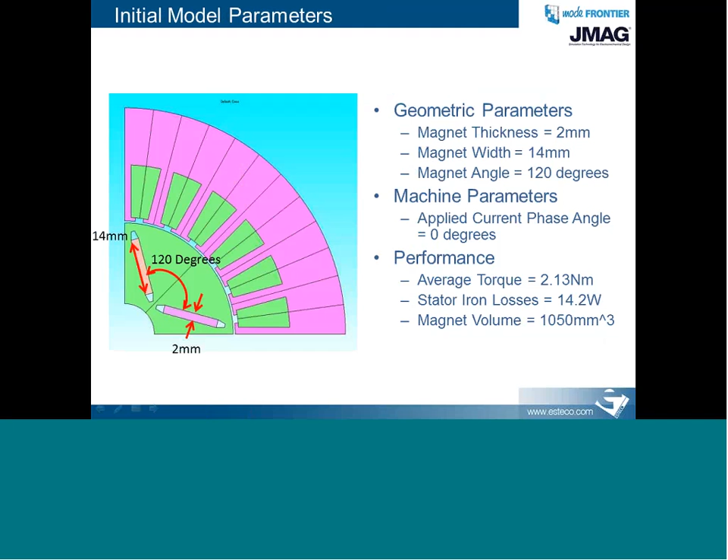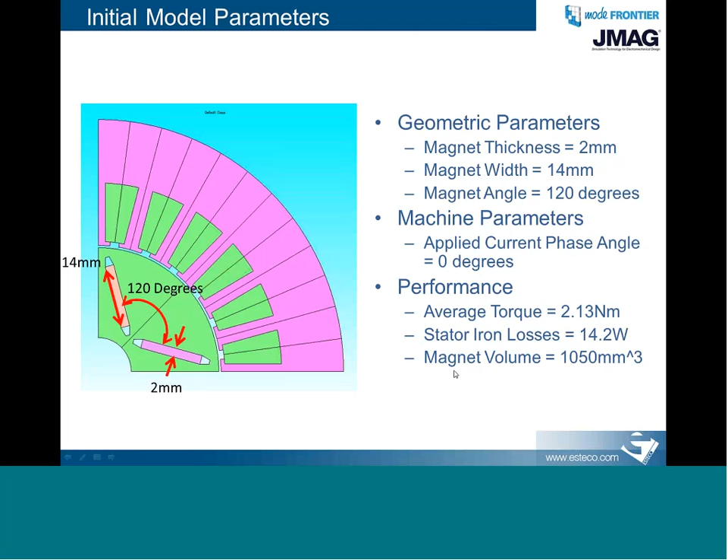All right, well, with the optimization, if we look at the initial model parameters, we see that the geometric parameters are as Brandon mentioned, and our machine parameters are as we discussed before. The performance of this baseline model, our average torque was 2.13 Newton meters. Stator iron losses were about 14.2 watts, and the magnet volume for a single magnet is about 1050 millimeters cubed.

So from that basic design, I was able to go back into JMAG, duplicate the study, and then create new studies for the minimum magnet volume, the maximum torque, and the minimum losses. So effectively the optimal value for each of the 3 parameters we were trying to optimize. Then I was able to run the analyses and pull the results from each of these models.

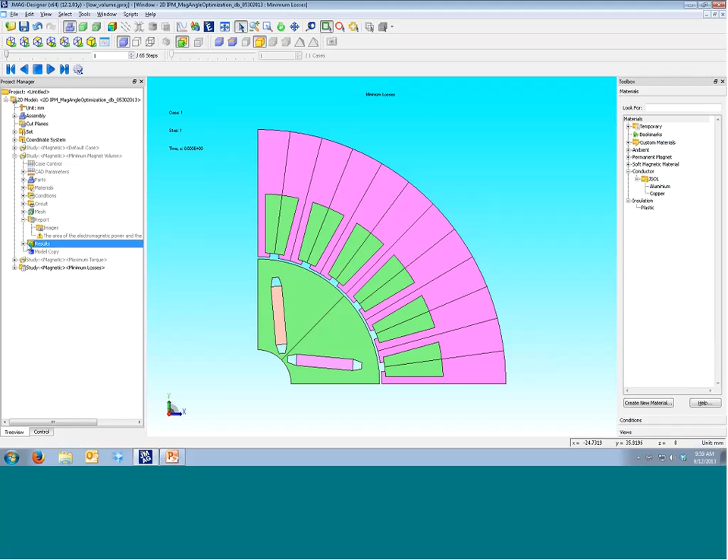So now with JMAG, we have a little bit more freedom to look at what those differences are, why they're occurring, and get a little bit more information than just the average torque and the average loss.

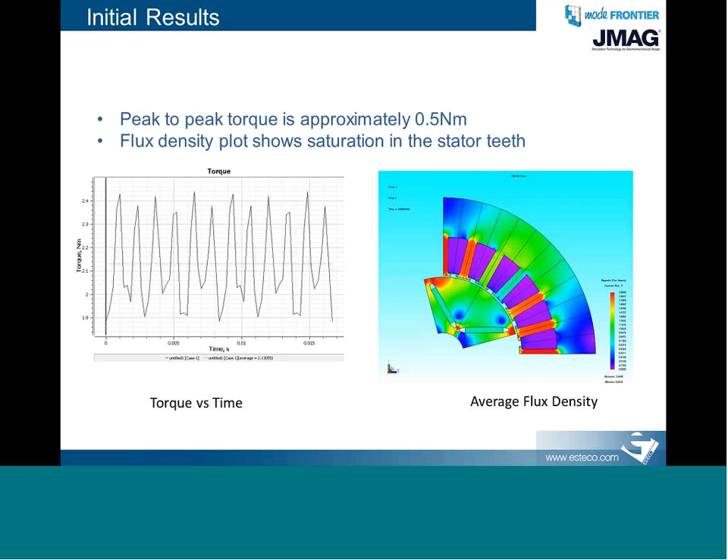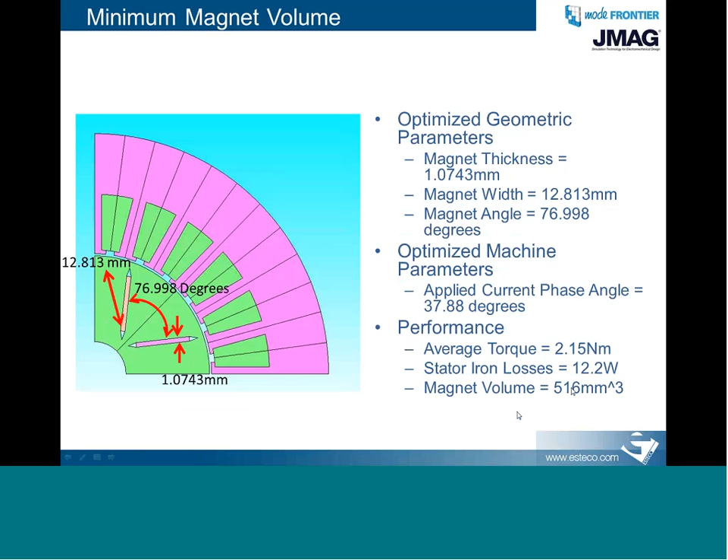So now if I look at the minimum magnet volume, this is the actual geometry we were looking at. Performance on the minimum magnet volume: average torque about 2.15 Newton meters, stator iron losses 12.2 watts, but the magnet volume nearly cut in half from our initial design.

So again, better utilization of the materials in this case to generate the output performance properties.

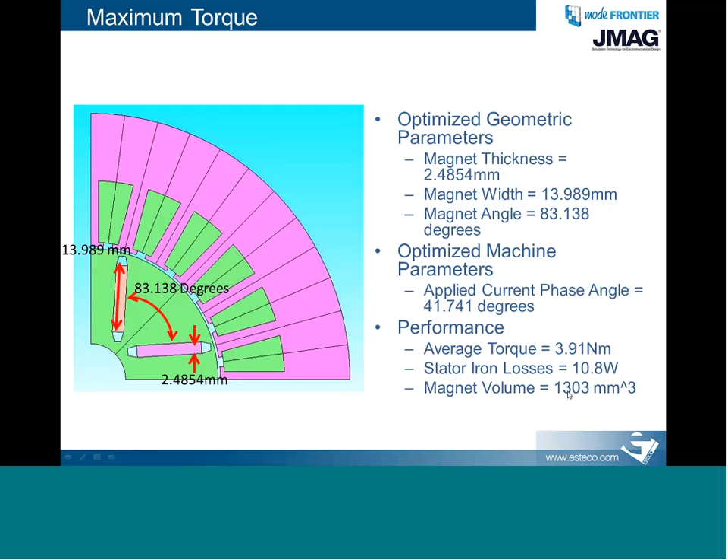In our maximum torque case, the magnet angle changed a little bit, along with a bit of magnet width. But now we're getting an average torque of about 3.91 Newton meters, almost twice the average torque. Stator iron losses are still almost 4 watts lower, and our magnet volume is only slightly higher than in our initial case. If we look at the flux density and torque waveform, the peak-to-peak torque is approximately 2.5 Newton meters. So in order to generate that higher average torque, we have to get a fairly big swing in our peak-to-peak torque, showing us the trade-off.

If you were just to run the optimization and say this is the design that gives maximum torque, you might neglect the fact that the average torque is high, but the peak-to-peak torque is also significantly higher than in our initial case. This torque variation might not be acceptable in the machine design. However, in some cases, that peak-to-peak torque difference may be an acceptable trade-off to get higher average torque.

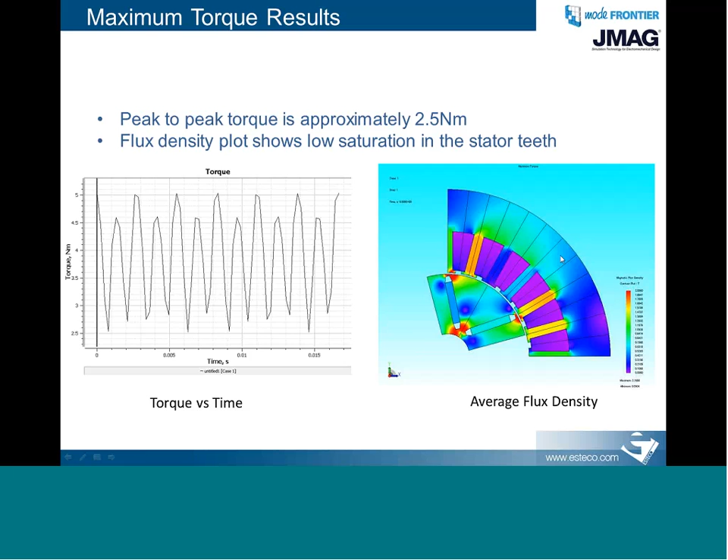In our minimum loss case, the magnet angle actually increased, and the width of our magnet decreased a little bit. Our average torque goes down just above the threshold, but our stator iron losses are at 7.46 watts, nearly cut in half from our initial iron loss estimate. Our magnet volume is also only slightly higher than in our default case.

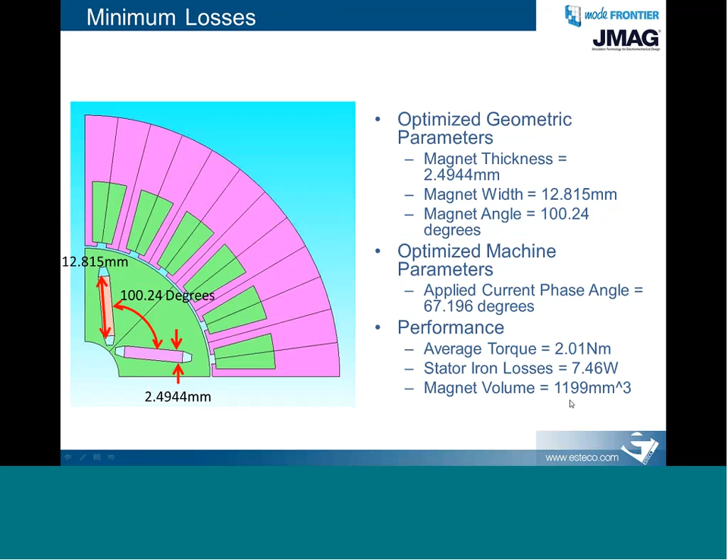Looking at the minimum loss results, our peak-to-peak torque now goes from about half a Newton meter in our initial default case to about 0.4 Newton meters. So it's actually a tighter peak-to-peak torque generating the average torque. If we look at our flux density plot on the stator, there's nearly no red or orange, it's all greens and yellows, meaning very low flux density, which again leads to a much lower iron loss result.

Pulling all 4 of the designs together, we can see that optimized designs can have significant differences between themselves and the original model. By using modeFRONTIER, it becomes easy to select which parameters to optimize or choose different parameters based on what type of results you want to look for.

Another thing I want to mention is that it's also possible to have equation-driven parameters. So if we wanted to limit the magnet volume to a certain physical value, we can change the magnet width and the magnet height to correspond to that exact magnet volume. Those equation-driven parameters are also a possibility.

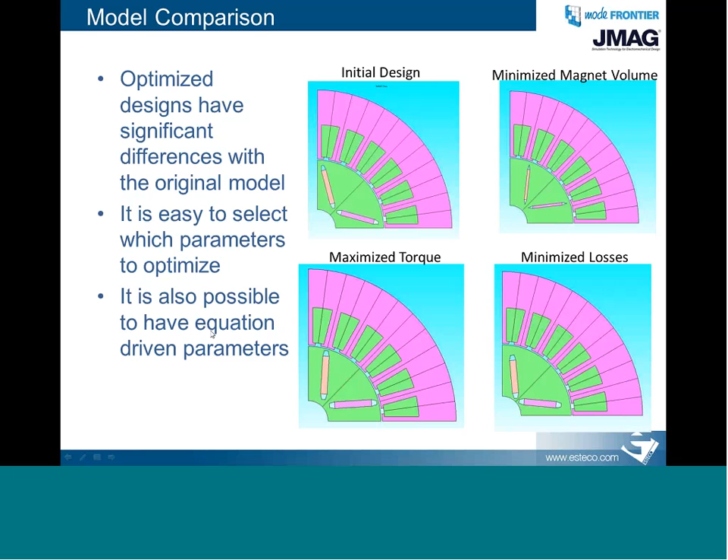As far as my conclusions go, by optimizing the design, it is possible to achieve at least 2 Newton meters of torque while cutting the magnet volume in half, or doubling the output torque, or cutting the losses in half.

To achieve these results requires testing alternate geometries and excitation conditions, which, as mentioned by Brandon, involved up to 1,000 cases tested. This can be easily done with an optimization tool, whereas going step by step and trying to do it on your own or independently might be time prohibitive or nearly impossible.

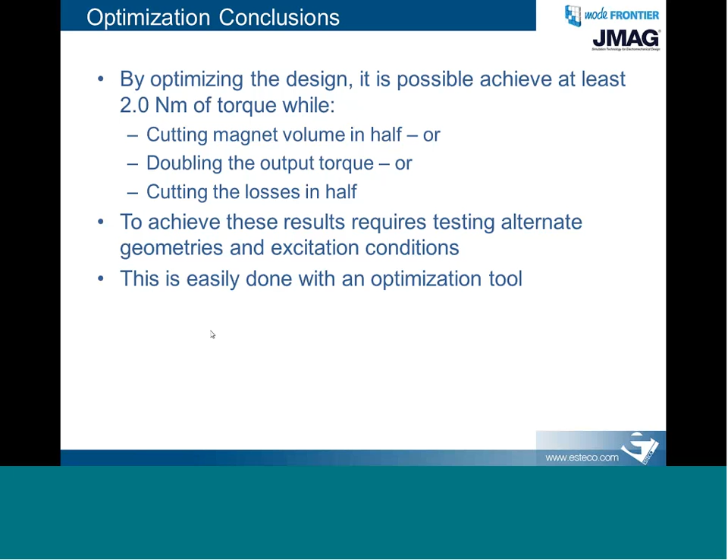I think at this point that concludes our presentation, and we can open up the floor to questions, but I'll turn that back over to you, Sumit.